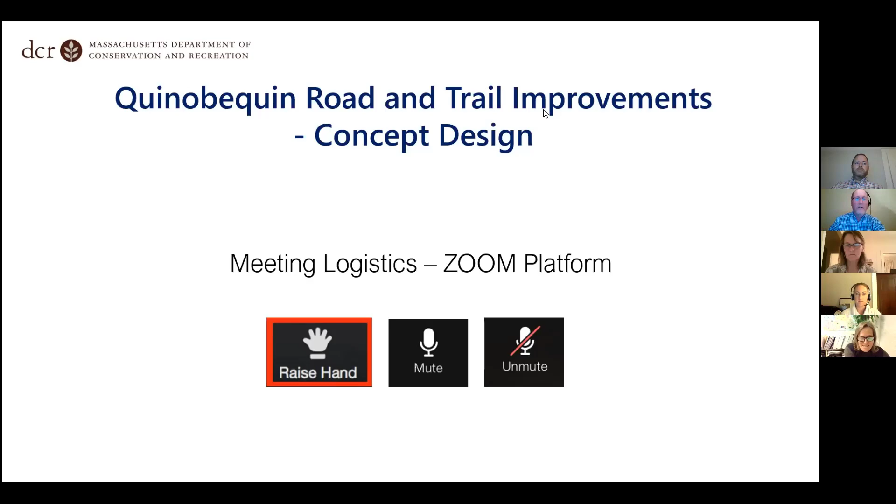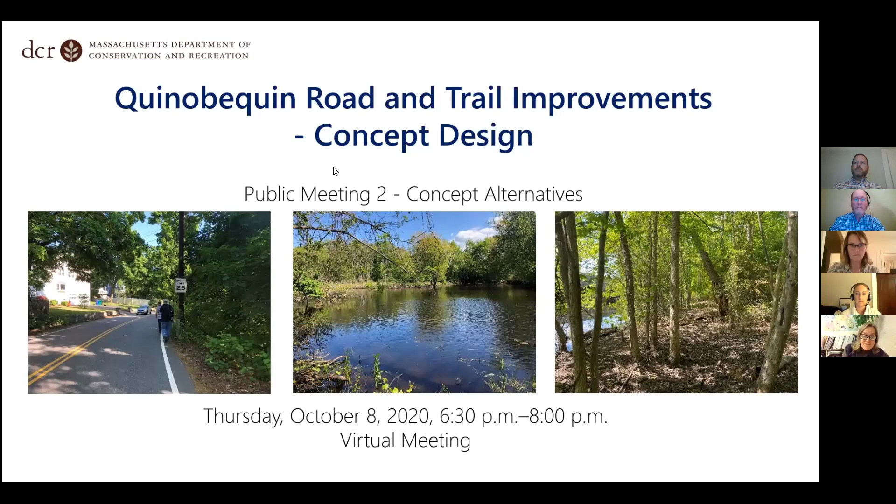On behalf of Governor Baker, Lieutenant Governor Polito, Secretary Theoharides, and Commissioner Montgomery, we're delighted you can be here. Thank you so much for taking your valuable time to join us.

We have a really big DCR design review team that I'd like to thank as well. Jenny Norwood is Director of our External Affairs. Ann Fessinger is Director of Public Outreach. Thank you for organizing with our design consultant and Geoffrey Morrison-Logan this Zoom platform. Patrice Kish is Chief of Design and Engineering, and we have a big design and engineering crew.

Jeff Parenti is Deputy Chief of Transportation Engineering and Construction. And from Jeff's group, Jason Santos, Mark McLean, Dan Driscoll, and Yvonne Jones have all given us their time and expertise. From Resource Protection, Jeffrey Harris, Cultural Resources, Ellen Birkland, and our ecologists Casey Dugan and Ali Akambi have also reviewed drawings and made recommendations.

Erica Aubin and Kevin Hollenbeck have helped us out from DCR Operations, and Danielle Mellett, DCR Landscape Architect, is managing the project with me. So thanks everyone again for your time and technical expertise.

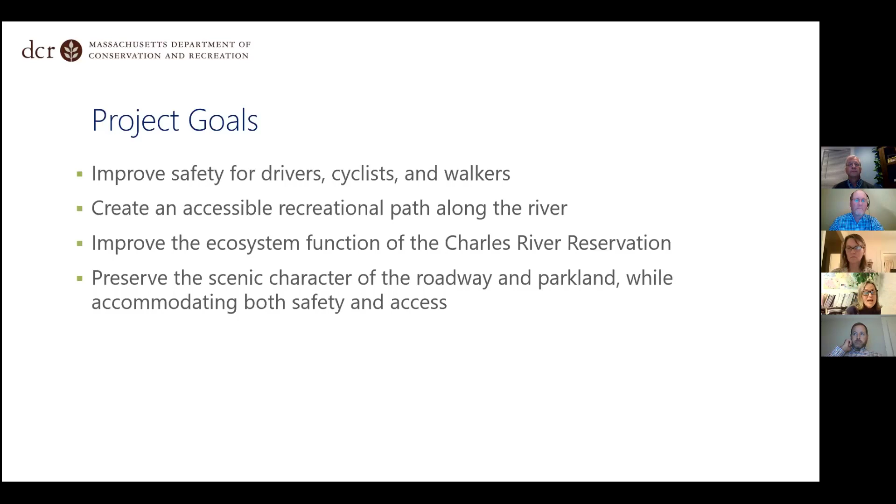So with that progress context, we can go to the project team. Again, you can see the depth and breadth of VHB's consultant team. Primarily Pete Sorensen and Geoffrey Morrison-Logan with VHB, and we have IBI doing landscape architectural design. Pete, I'm going to turn it over to you to introduce your team in depth and present the alternatives.

Great, thank you, Jenna, and good evening, everyone, and thank you for attending this meeting. My name is Pete Sorensen. As Jenna said, I'm the project manager for the design team.

We do, in fact, have a real in-depth design team of environmental scientists, structural engineers, construction engineers, surveyors, public outreach, landscaping, and geotech. So we have the full gamut, in addition to the IBI team, which brings a strong recognition of landscape architecture to the team. We have lighting sub-consultants, so we have an in-depth team behind us here for these concepts.

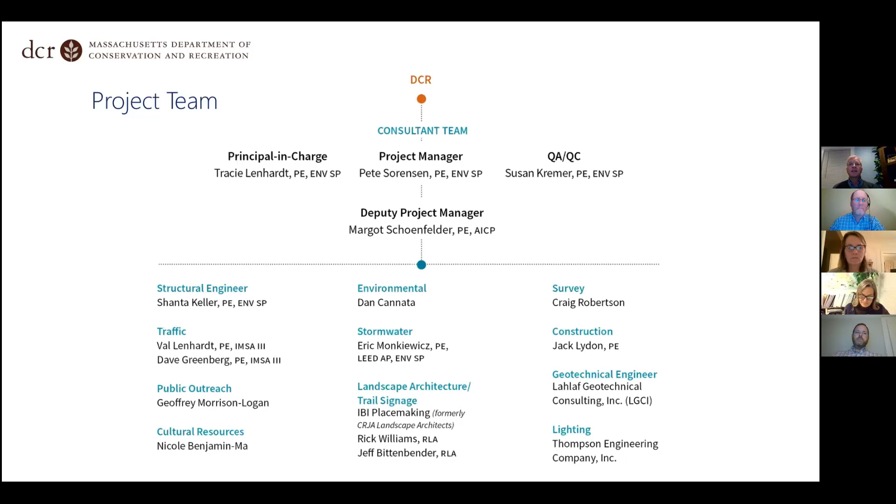On behalf of the project team, we're very excited to have the opportunity to present these three concepts. As we mentioned earlier, following the presentation there will be a question and answer session. We hope this will foster some creative input and discussions, and certainly we would love to hear your opinions on the alternatives that we're presenting here this evening.

This meeting is an important part of our design process. It'll help us define the direction and focus for the project as we move forward to the next phase of concept development.

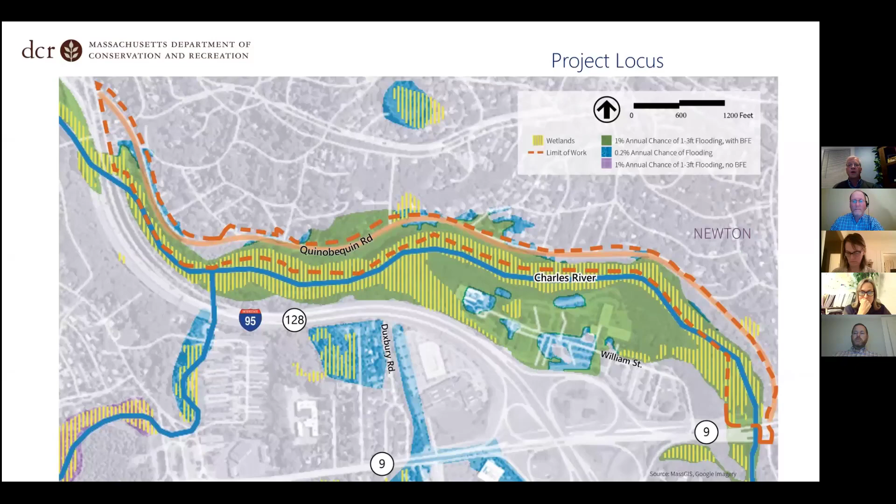Just as a reminder to everybody, or for the newcomers to the meeting, the study area includes the Charles River Reservation from the river's edge along the residential property line on Quinobequin Road. It starts at the northwest, on the left side of your sheet, at the I-95 128 overpass, and it ends at the intersection with Ellis Street. This will provide the long overdue connectivity to Hemlock Gorge.

Before we jump into all the alternatives, I'd like to take a few minutes to discuss some of the founding principles behind the selection of the decision-making process. There are several components, things like regulatory requirements, design criteria, permitting requirements, and certainly along the corridor there are physical constraints. We also look at this from a constructability standpoint, whether we can actually build the concepts that we're presenting. But there's much more than that that makes a successful and sustainable project.

I think first and foremost, it's the stakeholder input. It's the users and the abutters, the stewards of the facility. We had a meeting back in June, as Jenna mentioned earlier, and we took what we heard at that listening session.

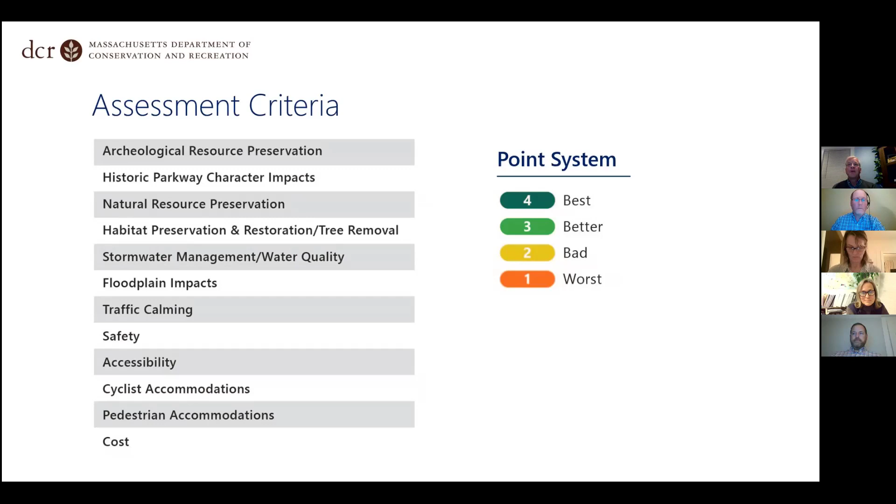Several of you provided comments during the meeting and after, along with discussions with the City of Newton and comments we received from them. Taking the DCR goals Jenna discussed and all this input into consideration, we collectively came up with the following assessment criteria as we prepare our alternatives for this project. We have a full matrix comparing these alternatives later in the presentation.

I'm not going to read all the assessment criteria definitions, but a couple things are worth mentioning. The Charles River shoreline is a highly sensitive area for archaeological resources, so we want to express the importance that all construction activities in the undisturbed areas between the roadway and the river really need to minimize any excavations.

Quinobequin Road is listed on the National Register of Historic Places. Alternatives will need to focus on minimizing any change to the character of the parkway and its setting. The wooded area along Quinobequin Road contains many vegetated wetlands and small tributary streams associated with the Charles River, all subject to regulation under the Wetlands Protection Act.

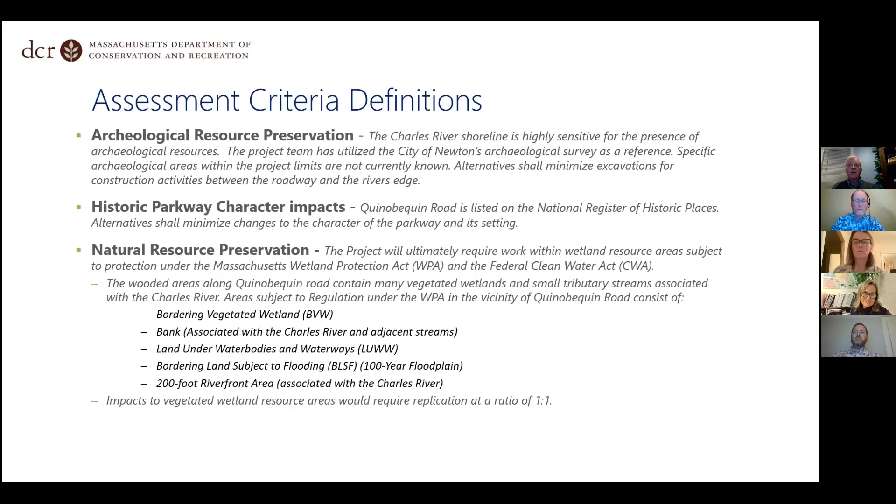The goal here is to minimize any encroachment within the wetlands. The undisturbed wooded areas surrounding the footpaths are home to many wildlife species native to the watershed, so any proposed tree clearing in the riverfront area would require replanting and restoration to maintain the wildlife habitat.

Finally, a significant portion of this project is within the 100-year floodplain. Some interesting stats from our existing conditions analysis: 20% of Quinobequin Road itself is in the floodplain, and over 80% of the existing footpath is in the 100-year floodplain. The big takeaway is that we have to be very sensitive to any filling in these areas, and we'll have to mitigate that to provide a net zero impact.

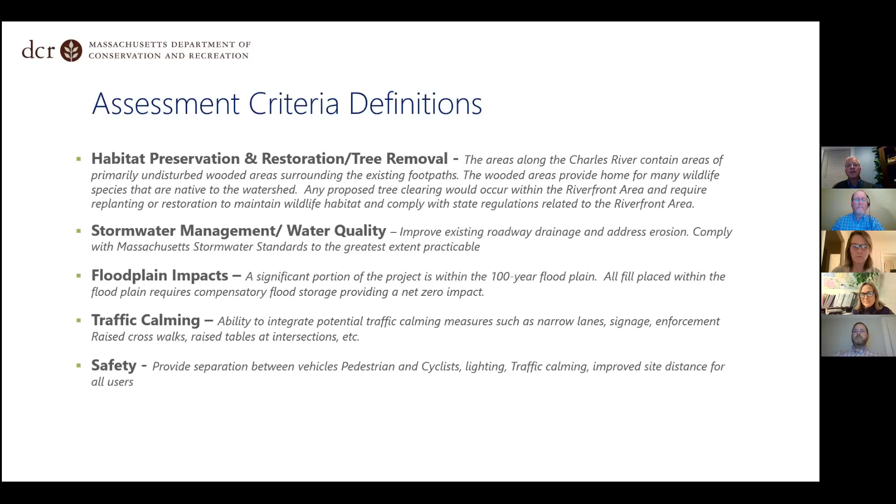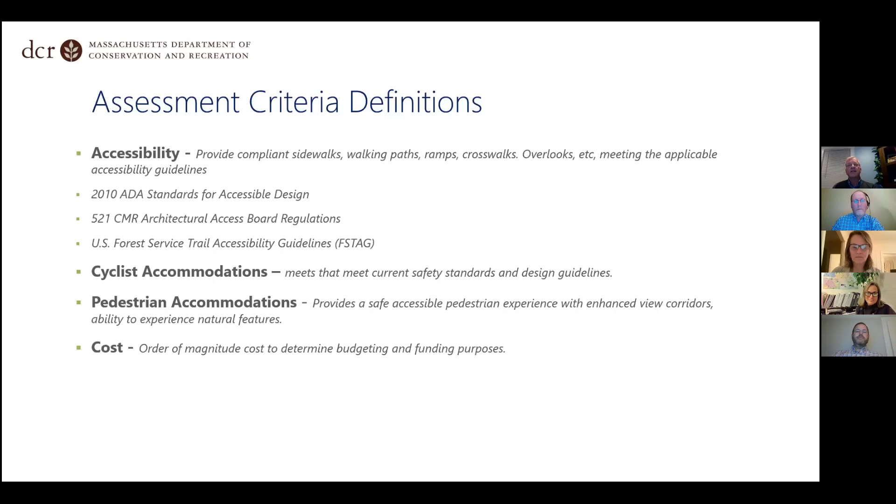So what we're really saying is that we can't excavate, we can't cut down trees, we can't encroach into the wetlands, and we can't fill. It really shows how environmentally sensitive this area is, and those are important things to keep in mind as we look at these concepts.

So now here's the part I'm sure you've all been waiting for, the introduction of the three alternatives. For clarity, we've stacked all three alternatives so you can see the difference between them.

Alternative one we've called the 21st Century Parkway. This is probably the most creative of the three, and certainly will give us all a lot to think about. The proposal here is to actually change the traffic patterns to one-way in the northbound direction from Route 9 to Route 16. We're proposing sidewalks along the residential side.

By reducing the roadway width with the one-way alternative, this allows us to provide a 10-foot shared use path and still maintain a minimum 5-foot buffer in the gained space. I should point out we have a dimension line in this section showing the existing 24-foot roadway. So we're widening the footprint by a maximum of 5 feet typically, but there are definitely some areas where it's a little less throughout the corridor.

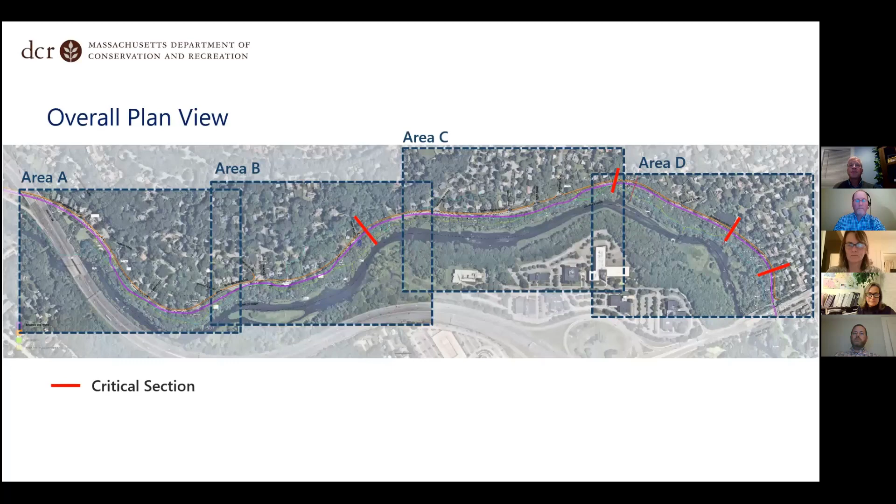We'll start with alternate 1 in area A. Just as a reminder, this is the 21st Century Parkway, the one-way operation with the adjacent shared use path. All 3 of these alternatives have a color scheme that is consistent throughout. The purple you see will be the 10-foot shared use path, the orange is the 5-foot sidewalk, the green is the existing footpath, the yellow represents areas that we found along the corridor where we could potentially add parking and pull-off areas, and the blue represents boardwalks where we're elevated over wetlands or over topography and overlook locations. And the random powder blue line running through the plan, that's actually the limits of the 100-year floodplain.

As mentioned before, the project starts at I-95 128 overpass, and in this section we have room to provide a 10-foot shared use path adjacent to the roadway. It's anticipated that this section will be continued to Route 16 in the future, and this will happen under a separate project.

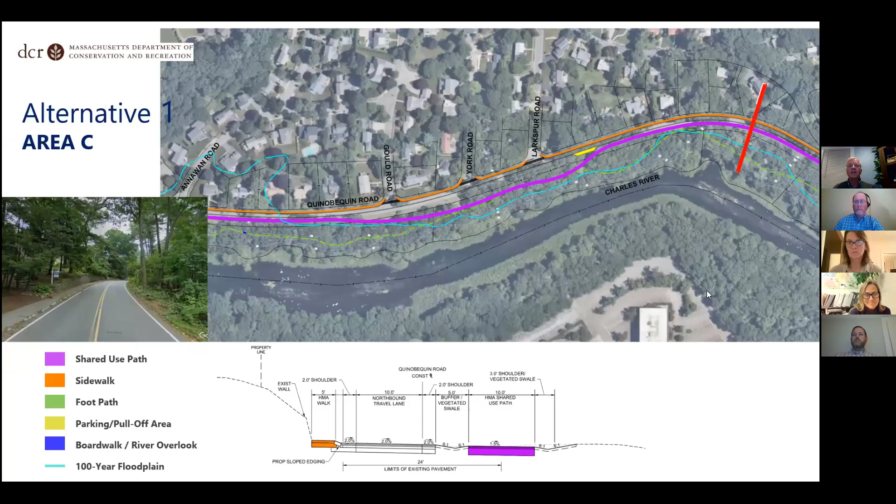Area D has two critical sections. The first one is Dresser Pond. Dresser Pond also has a cross culvert that actually serves as an overflow from Dresser Pond with a big head wall. So this became a real pinch point in the cross section. We wanted to make sure we could fit everything in here. We did have to, in all the alternatives, slightly shift the geometry of the roadway, but as you can see from the section, we're pretty confident we can fit it in there. Here's a section where we'll actually need guardrails for vehicle protection. We can fit the guardrails, the sidewalk, and the full section within there.

Because of the proximity of the shared use path to the roadway, there's been several discussions about whether the addition of the sidewalk under this alternative becomes redundant and could potentially be eliminated. This is especially true in really tight areas like we're looking at, so we're interested in some input. Strategically, there's a couple of options: we could eliminate the sidewalk, or we could strategically locate it similar to how it is today, since it's an intermittent sidewalk. We could strategically place links between streets with crossings to the trail. So that was an area of discussion we thought worth reaching out about, to see if there were any thoughts on that under this alternative.

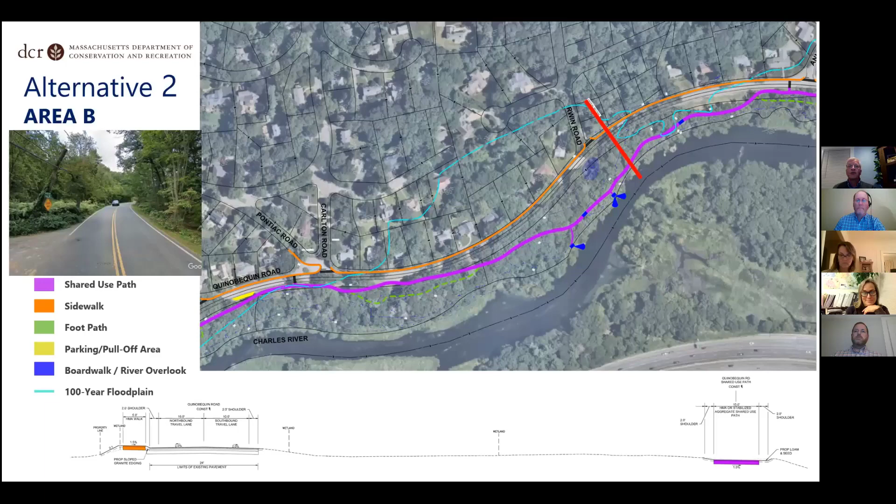Next slide, please. As you can see from this critical section, the path sits on the existing ground, so the only real excavation here is the path itself. So the concern of excavation is limited to the path. However, it is outside the disturbed area.

One of the things that I wanted to point out, it's really an important discussion point here, is when we're putting the shared use path within the woods, the construction of this path really takes out quite a swath of trees. We're looking at a 10-foot path with 2-foot shoulders on both sides, 14 feet. And by the time you actually clear the site, get your equipment in here, take a look at the trees that you're actually impacting, we're seeing in some of these areas you may have a 20-foot swath of trees that are removed, a significant concern for the local habitat.

Next slide, please. In the final area, D, our first critical section here is Dresser Pond. Again, you can see that the section easily fits in with some minor tweaking towards the river. We can easily fit the sidewalk next to Dresser Pond.

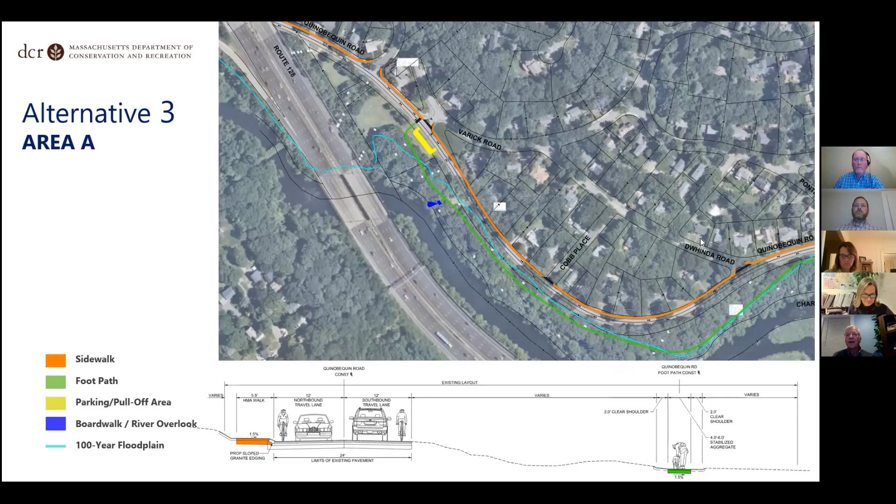We'll be upgrading the existing boardwalks that are out there to make sure that they're properly permitted. Next slide, please. Again, we're doing a lot of the same rework on the intersections and the same safety improvements we talked about earlier, critical sections and wetlands. In the critical sections, the wetlands are being missed once again, similar to alternate 2.

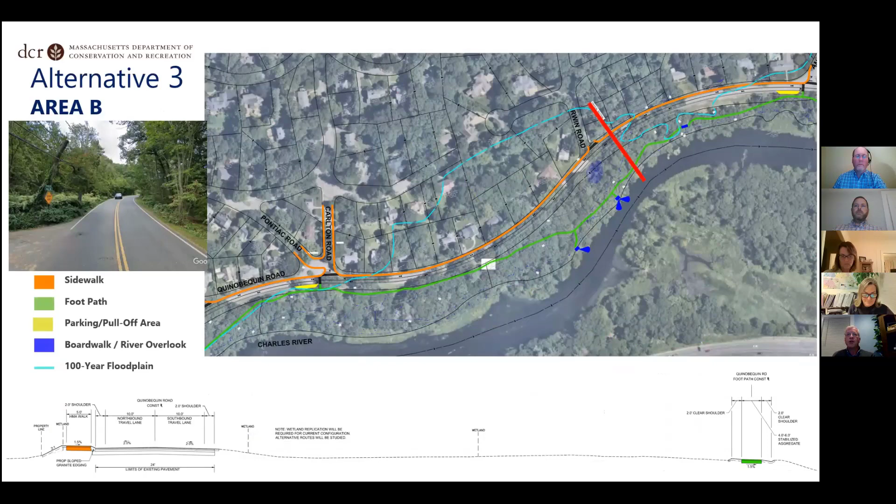Next slide. Our critical section concerns are the same here as we had in alternate 2. Here, certainly the path width is much smaller, so we obviously reduce impacts, but we still have the same concerns. Next slide.

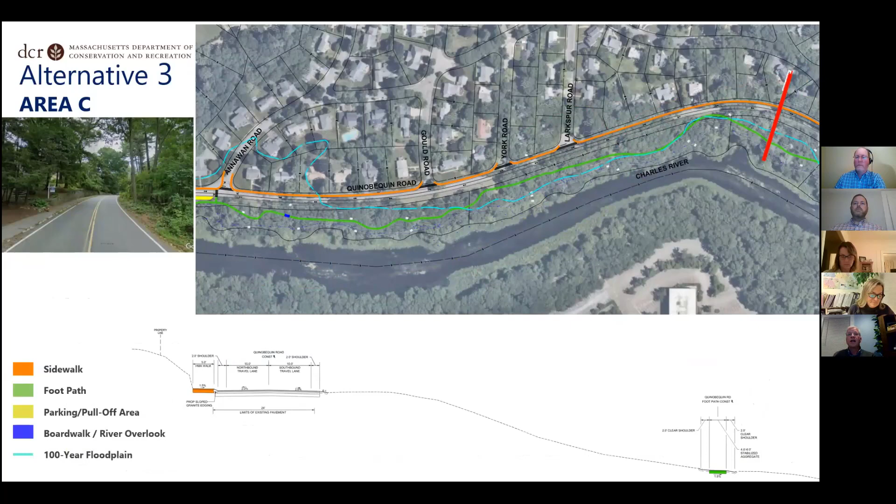At Dresser Pond, in this area, the topography really fluctuates, and there's a ravine. The intent for this alternative is to show the ability to utilize U.S. Forest Service standard guidelines to keep the path on the existing ground, not go into a full ADA compliant structure like we did in alternate 2, but this allows us to keep the path on the ground to the greatest extent practical.

Finally, as we approach the Route 9 intersection, we want the path to have an accessible connection to Hemlock Gorge. So we would be providing a boardwalk similar to alternate 2, so we can traverse that steep slope.

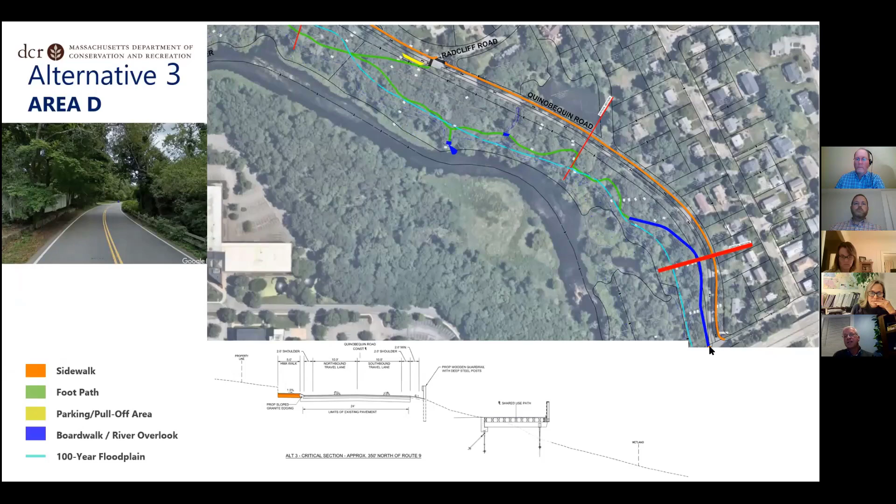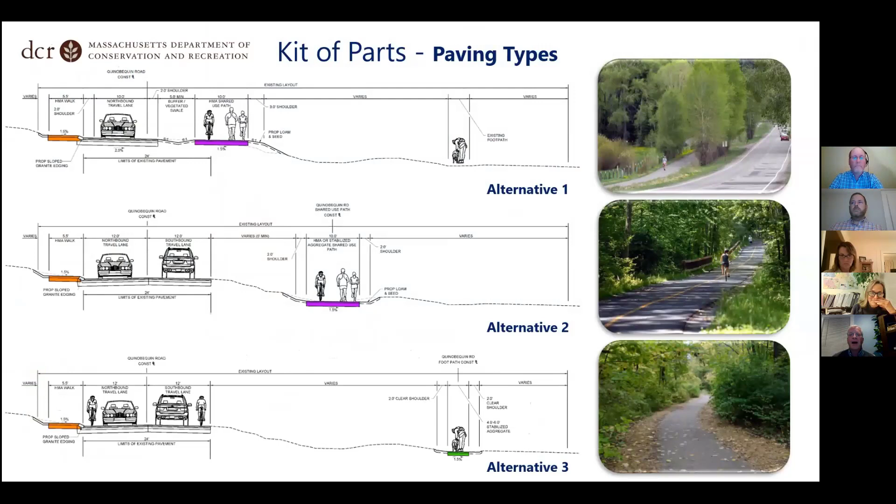With that, I'm going to turn it over to Rick Williams from IBI, who's going to talk about some of what we're calling the kit of parts, or the different components and details of some of the things that I've been talking about. All right, thanks Pete. Like you said, I'm Rick Williams, IBI Group.

I wanted to walk you through some of the potential applications of the kit of parts that we talked about in our first listening session. The first one I want to talk about is the paving types, and in particular paving location. Some of the images to the right are fairly representative of the different alternatives we have. Alternate 1, we're seeing in the purple, with the purple highlight underneath the shared use path in the section. We're seeing it similar to the image on the right, although this is a 2-lane road.

We would be suggesting going to a 1-lane road, but you're seeing that the asphalt path is relatively parallel to the edge of the road. It has undulation in both horizontal and vertical alignment, which is a benefit. If we run into a situation where we don't really want to be against the road because we've got an existing stand of really mature trees, we have the ability to pull off and maneuver around them.

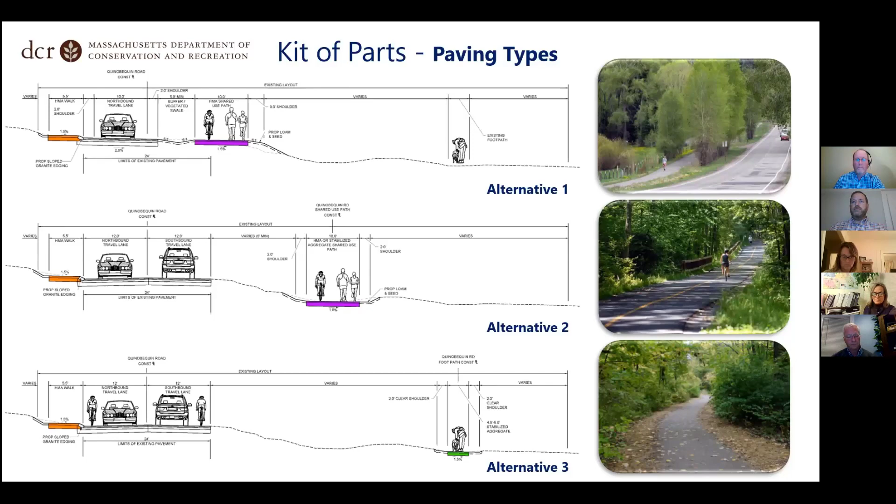Next, wanted to talk a little bit about passive stormwater. I know Pete had mentioned it in a few places in the plan views. We're looking at lots of different ways to handle stormwater and to get some infiltration and storage capacity out there, because we know that in a lot of cases we're in the 100-year floodplain. Lots of water in the area generally, so we're looking to find ways to create space for that, to treat it, basically take out the suspended solids and allow water to infiltrate back into the groundwater.

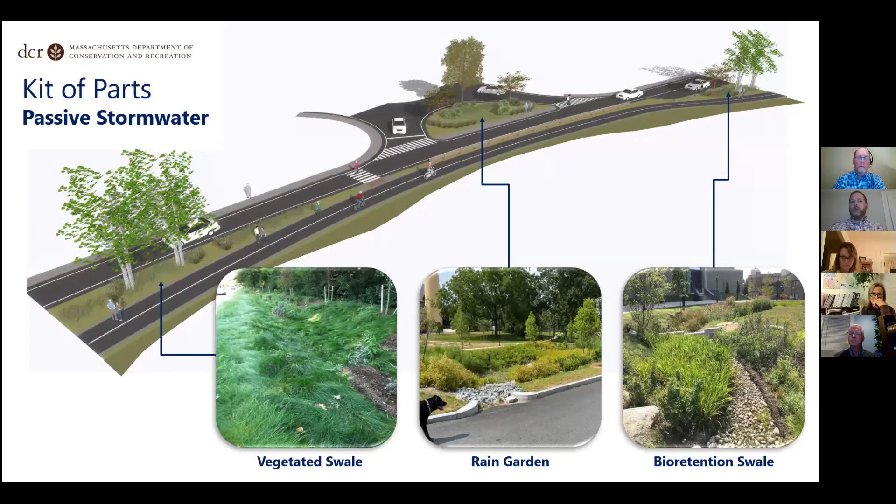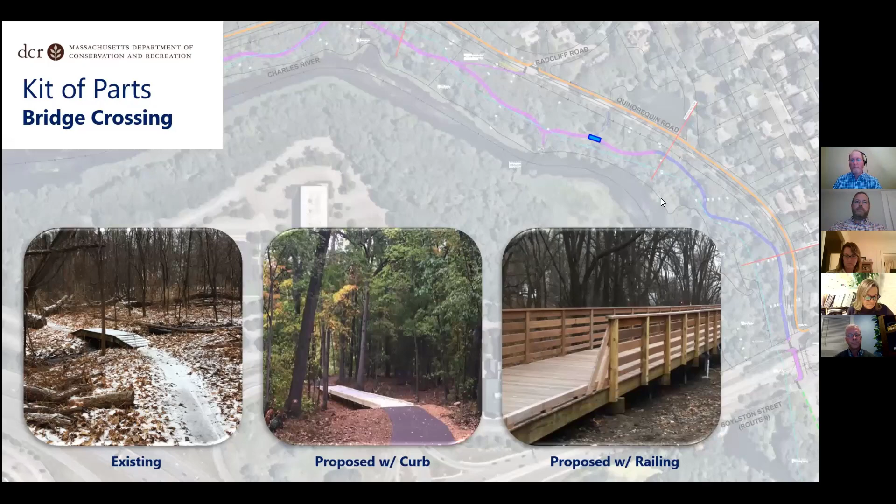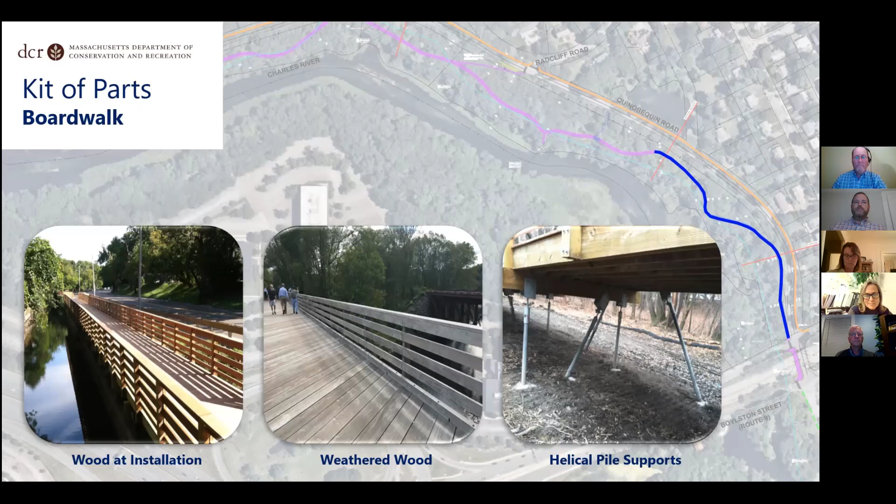We can do it many different ways. We can do an at-grade rock overlook where we get closer to the water, if grades permit it and we have the ability to get down closer to the water, maybe using boulders and natural materials. In other locations where grade may not permit it and we need to come in a little higher, we get elevated with a deck overlook. There are countless deck overlooks up and down the Charles River reservation that have been done in the past.

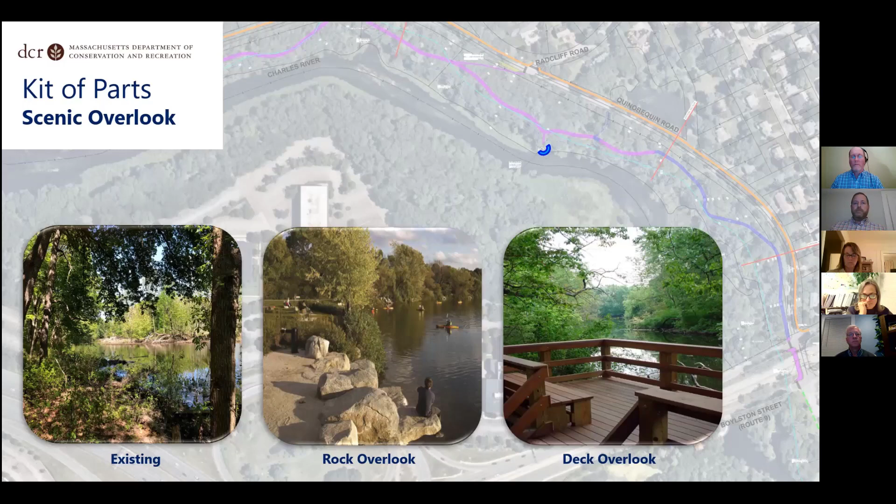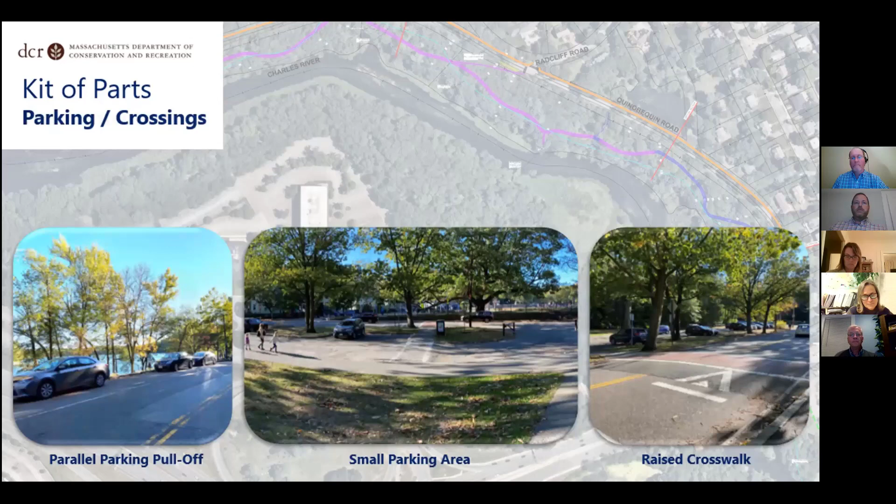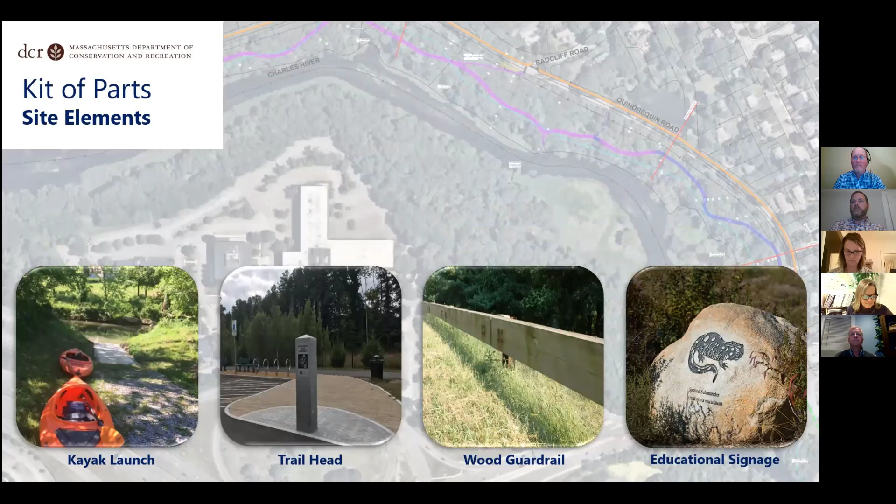Excellent. So Rick and Pete, thank you so much for walking us through that. For this evening, we wanted to spend a little bit of that quality time walking you through each of those three alternatives so that you can understand the differences, not only in terms of the alignment but also in terms of some of the kit of parts that Rick just walked us through. And hopefully you've heard that there's a lot of flexibility along the length and along those elements that could happen as well.

So what we thought we'd also do before we open it up for Q&A is a little bit of a recap in terms of the assessment criteria matrix that was developed. As Jenna mentioned early in the conversation this evening, a lot of work went into understanding really the elements that we'd be evaluating. Pete gave us an overview of the dozen different elements that we had, the objectives we're trying to meet.

And really this comes out through a whole bunch of robust conversations from us as a team, having walked the site and being able to have a lot of great conversations about what should be in these different categories, from the listening session that we had with the community to following up with the town, and even through DCR in terms of some of the internal conversations. A lot of work went into this as well.

We find that when we put a certain matrix like this together, it's one of many ways that we can actually try to start to assess the different alternatives that we have put forth. And clearly tonight, we want to hear what you think about the assessment of these alternatives.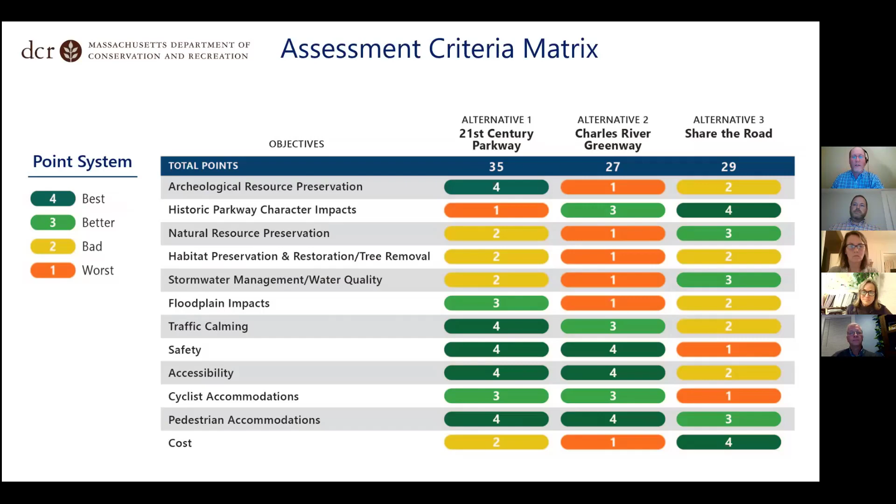So what we'd like to do is have you think about some prompting questions: what do you like about what you saw? What are the top assessment criteria from your perspective that should resonate with the alternatives? What is your preferred alternative? And most importantly, why? The whole design team can't wait to hear about your preferences and what rises to the top in that conversation.

In terms of reference materials to get the conversation going tonight, we'll probably leave this slide up for most of the conversation, because we think it captures the differences between these three schemes. But keep in mind, as Rick and Pete said, there's flexibility to divert around some trees or take the best of the length of that corridor to really bring it to life.

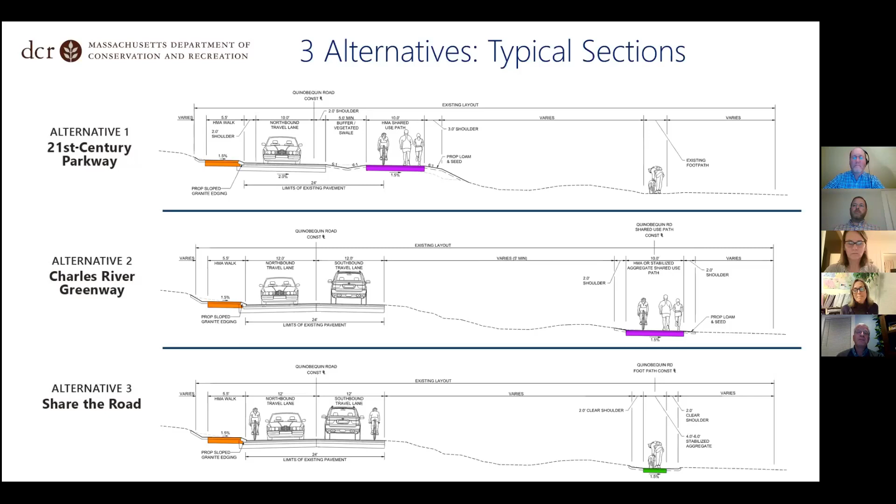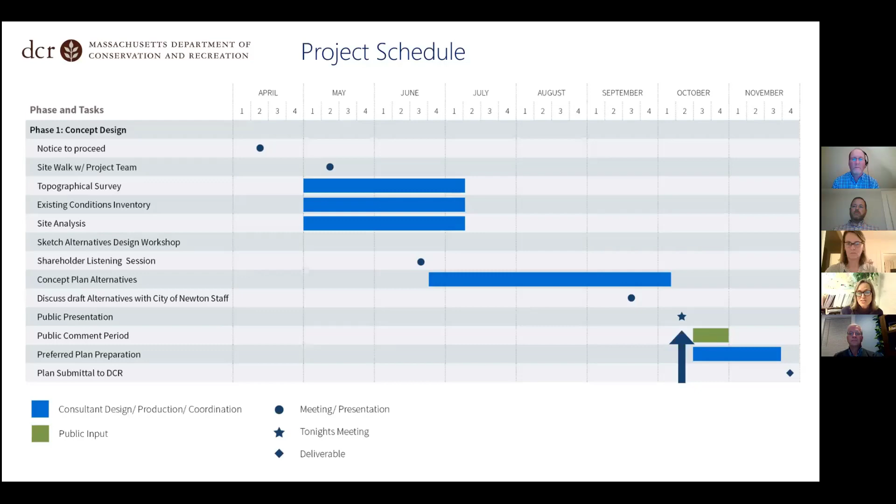If you want to submit comments, as we were saying earlier, we sure hope you do—please submit online. The best way to do this, because it is codified into one document, is to submit those comments at mass.gov DCR public-comment. If you have any problems, please reach out to Jenny; her address is jennifer.norwood@mass.gov. Again, the deadline for public comment is Friday, October 23rd. Please be aware that all the information you enter is public and cannot be redacted, but we value your opinion and hope you'll be willing to share it. And if you're just interested in DCR projects in general, mass.parks@mass.gov is the place to sign up.